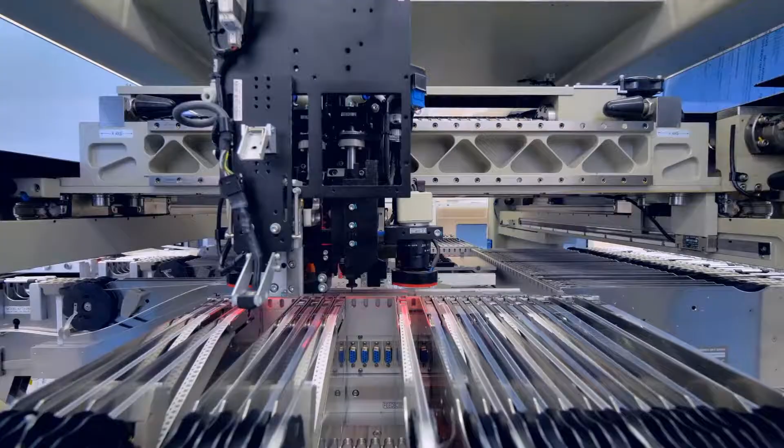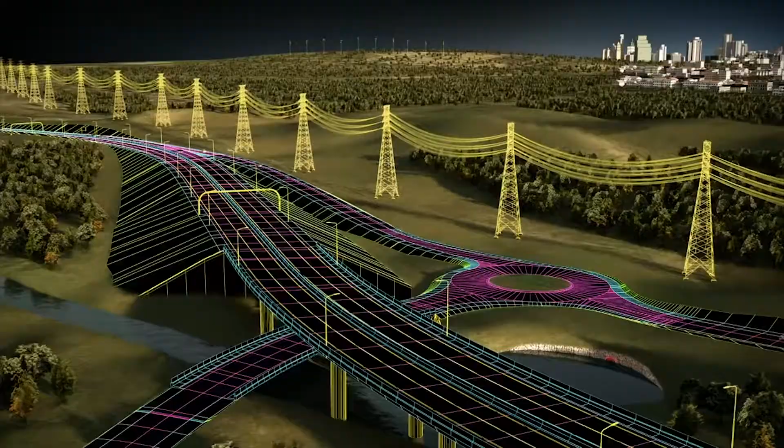Ultimately evolving into a singular solutions-based business for the manufacturing and AEC industries. Central Innovation started as a series of different companies. There was a Graphisoft company, an ArchiCAD company, one specialising in manufacturing, one specialising in architecture. Over the last 25 years, these companies have evolved from bare-based CAD software providers into something more sophisticated.

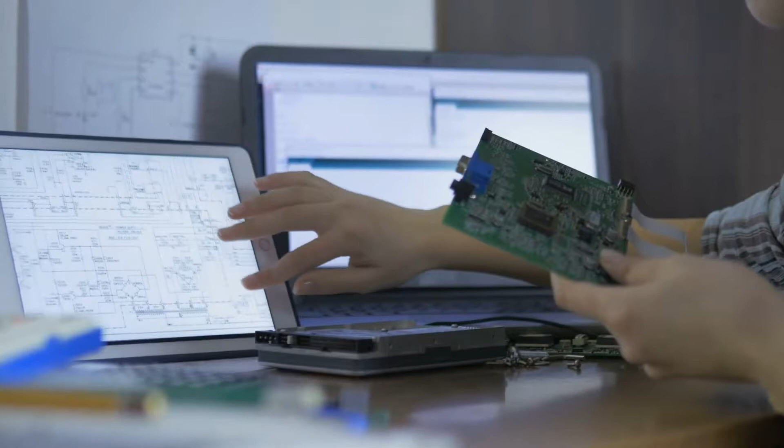This is standardised across both industries with the software, and it's now become a workflow solution that involves a lot more than just simply the software itself. So today, when you think about architectural design and engineering design, the design side is always the creative and analogue side, but the workflow process has become far more important.

So how you connect the pieces from the beginning of designing a product or a building all the way through to delivering that building is far more interconnected than it's ever been before.

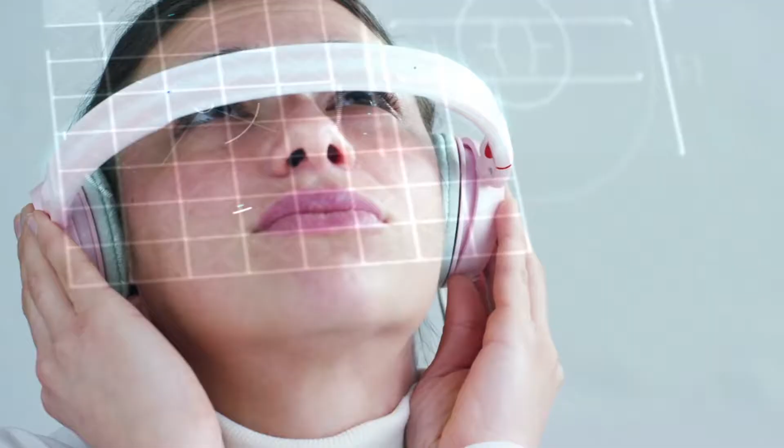And the single biggest change going on in the industry today is the automation of the workflow. So wherever possible, with the digitalisation of the design process, you're interconnecting the original design with the contractors all the way through to the builders themselves, down to building management, facilities management, and handover to owners.

So a much more complicated and sophisticated process, and Central Innovation in its journey has worked with our customers all along the way, evolved with our customers at their request to join more of the dots together. Once upon a time, they were all one-by-one steps done independently. Today, they are all interrelated, all coordinated, and working in what we call the workflow.

Once upon a time, Central Innovation was made up of these single companies that simply sold software. Over the last 10 years, that's evolved, and we've had to take on different service offerings - software, hardware, systems, and people - that in combination provide a higher order product and service solution for our customers.

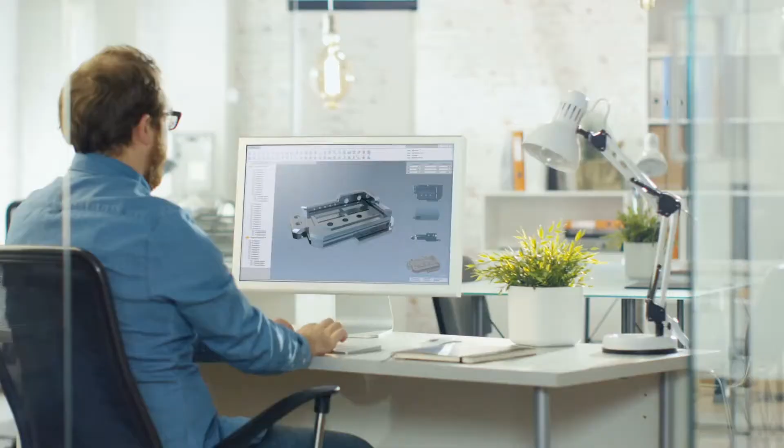The hardware is getting specifically Ferrari-style workstations that can really deliver on the complicated software that's involved with design. Our recruitment business involves not only employing and finding candidates for people, but training them so that our customers have the very best people available with the highest level of skills.

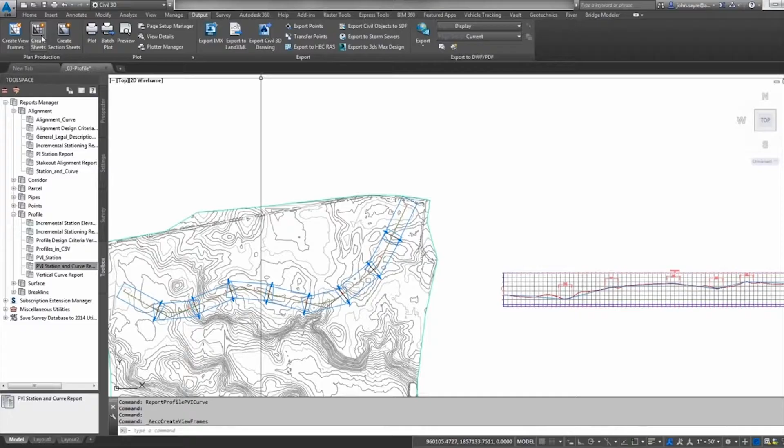Our software business continues to be, as it's always been, the best products from around the world that we can find for our customers to use. And that combines with our systems capabilities, where we bring all of this together to automate the process and to enable our customers to realise the potential of their software in their work environment.

Customers have always been central to our business. By working closely with them over the last 25 years, we've been able to develop solutions for them that enables us to be the very best partners available.

It is them that came to us and said, how do we go beyond software? How do we stretch the envelope?

So customers are central to our business today. The company has grown and evolved based on our interactions with our customers over the last 25 years. In a digital world that is ever more globally competitive, it's been imperative for us to work with our customers to take on the world, not just the local markets they traditionally had to deal with.

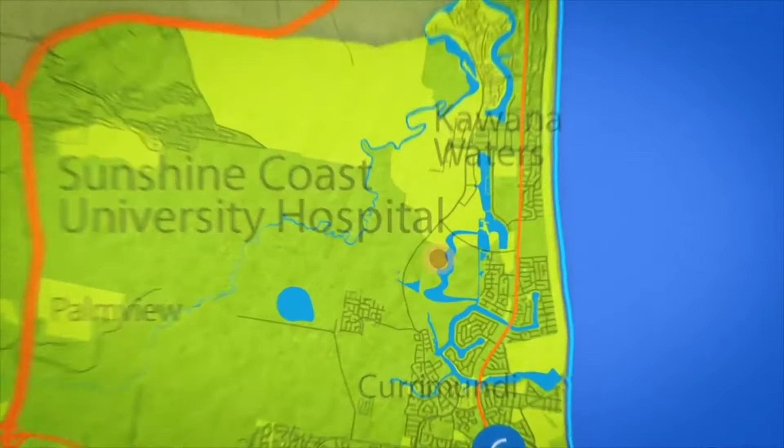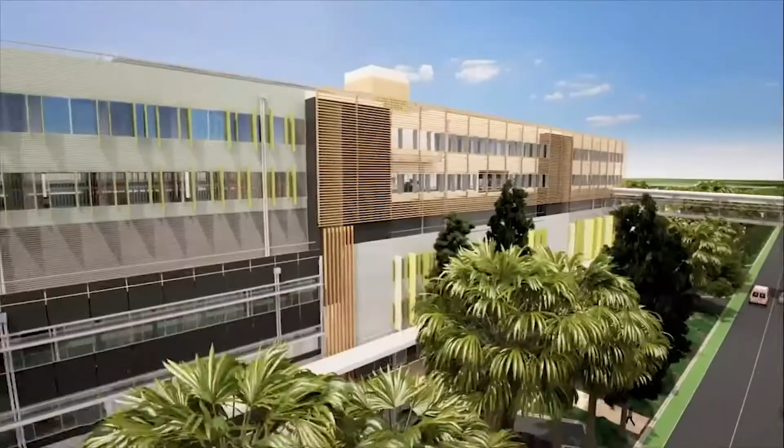The Sunshine Coast University Hospital was the first major health PPP project that the Queensland Government undertook, and was the largest non-replacement greenfield hospital built in Australia in the last 25 years. A really significant project. The need for quality, coordinated documentation was critical for a project of this scale.

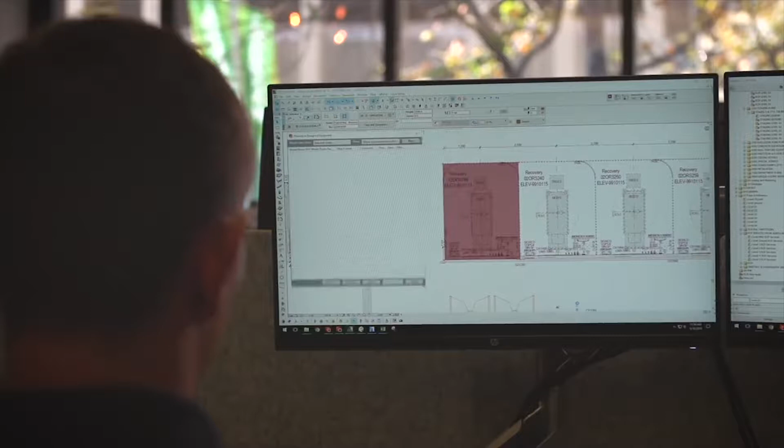The team here at HDR needed a universal approach to collaboration. Interoperability of project files was fundamental for the adoption of digital processes. We opted to combine ArchiCAD, dRofus, and other platforms to deliver this coordinated documentation.

We worked closely with the Central Innovation team to help develop a plugin for ArchiCAD and dRofus, which was not available at the time. When we first proposed our approach to BIM to the client, it was met with skepticism.

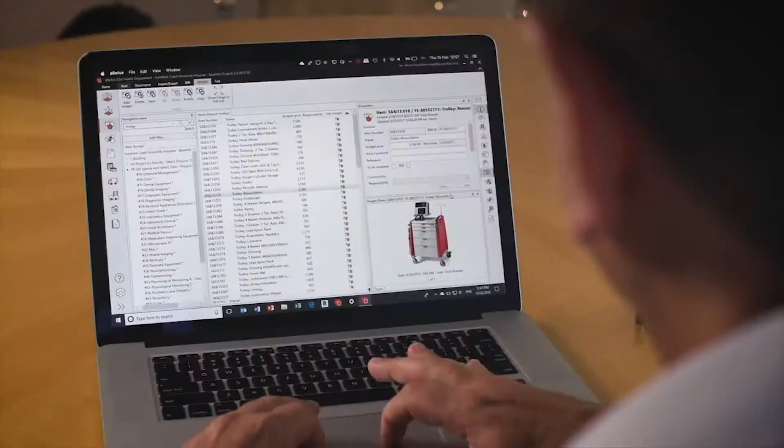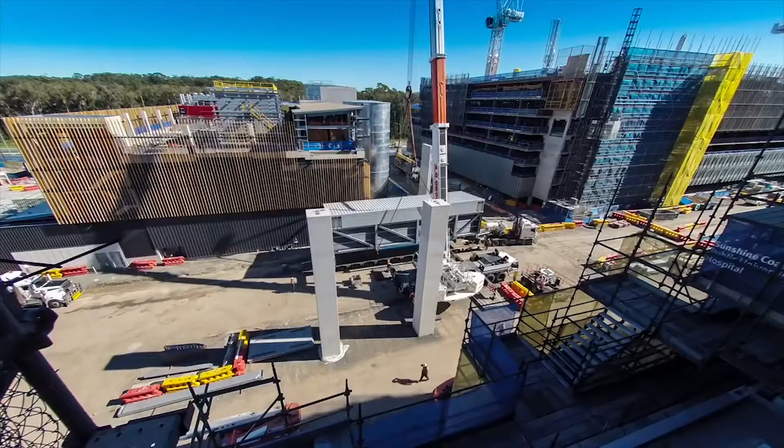The greatest success of this project was the ability for us to deliver bulletproof documentation on time and coordinated across the various disciplines. We proved that by combining ArchiCAD and dRofus, we could achieve the results we needed. The Central Innovation team were instrumental in making this happen.

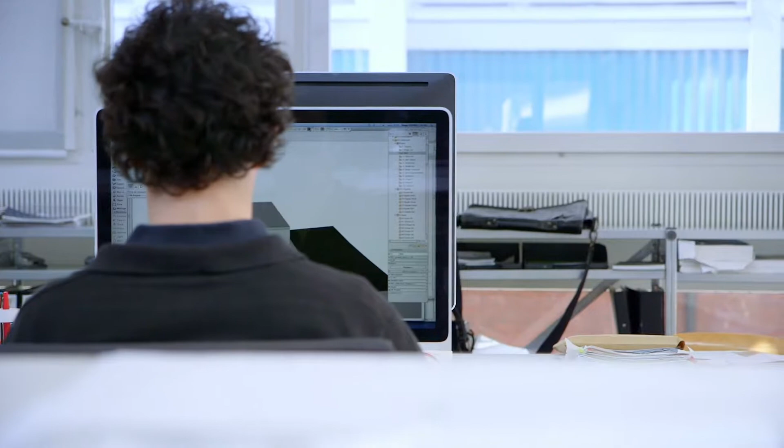We are an award-winning New Zealand-based architectural practice with a strong belief in the power of teamwork and collaboration. From a project's inception through to completion, there is constant dialogue with the client and other contributors, with engineers, constructors, and other specialists. This has brought about many challenges, namely sharing complex documents across various platforms, teams with the ability to adapt and handle a fast rate of change, and to document the process efficiently. So we really needed a specialised team to help us achieve our goals.

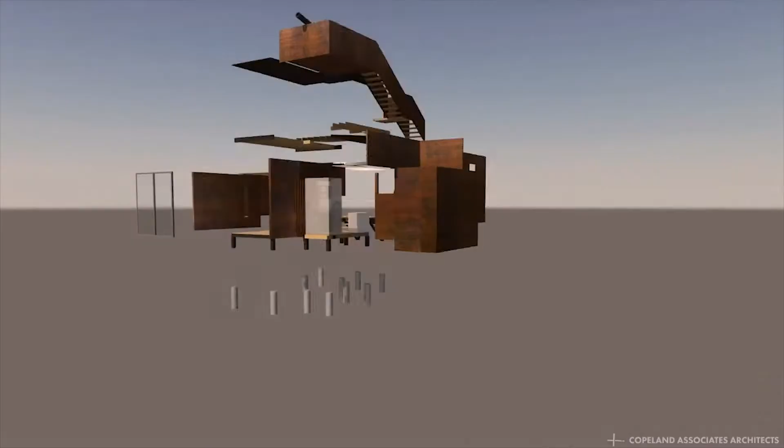We approached Central Innovation, who guided us through the entire process of implementing the ArchiCAD suite into our practice that has truly transformed our operations.

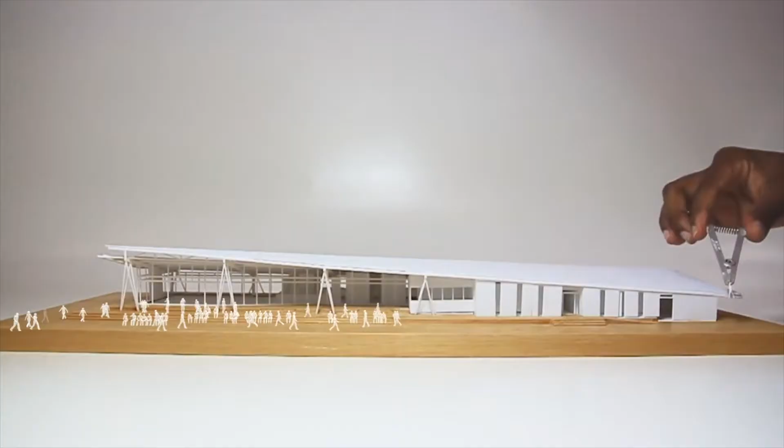It was clear to us that ArchiCAD was far superior in terms of tailored tools for the New Zealand building industry. We were also impressed by the customer support system established by Central Innovation. ArchiCAD has now become a vital part of our business success.

ArchiCAD has allowed us to become more productive with the team we have and given us the opportunity to broaden our service offering in-house. We couldn't be happier with the knowledge and service Central Innovation delivered, and we're certainly benefiting from the results.

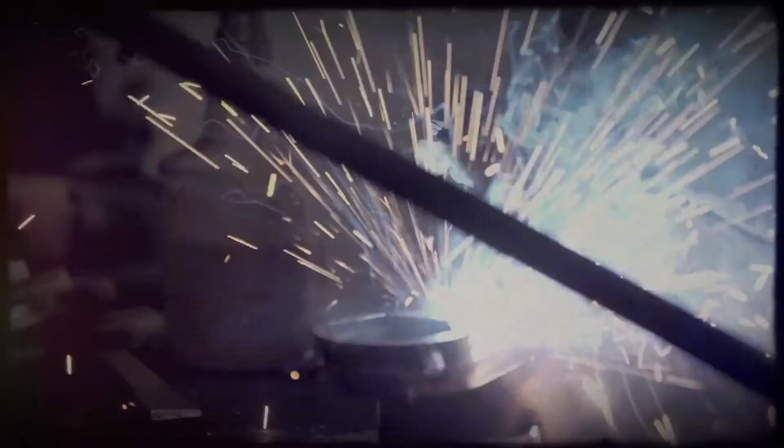Central Innovation has been assisting us at Kelley Engineering with our design processes for the past 7 years.

Having initially utilised SolidWorks PDM Professional to get our engineering documentation under control, the next step for us was to consult with Central Innovation on how it could be further used to implement an engineering change workflow.

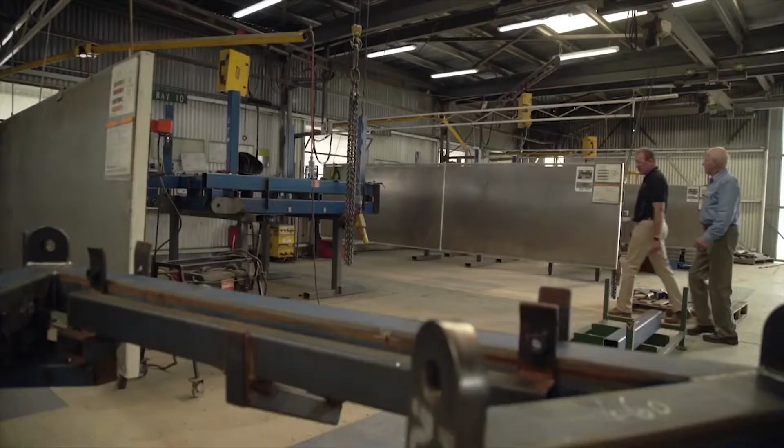They've recently assisted in the implementation of DataSuite Data Transformation Solution, which facilitates the seamless transfer of data across multiple platforms by providing a common language between systems.

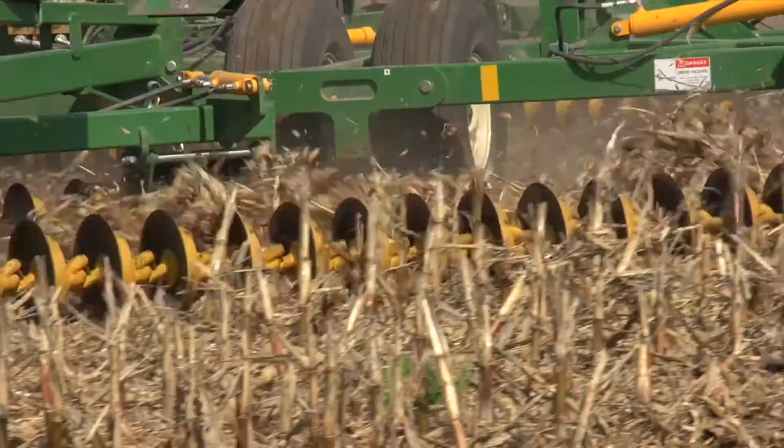We wanted to transform the organisation from a paper-based to an electronic system to optimise our supply chain and production, as well as those of our overseas partners.

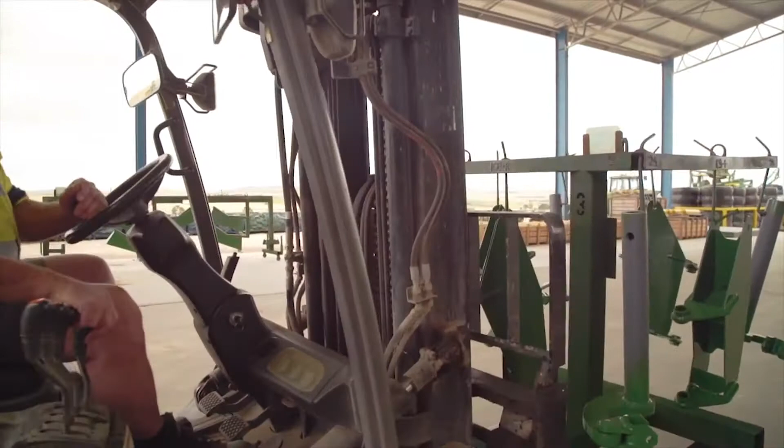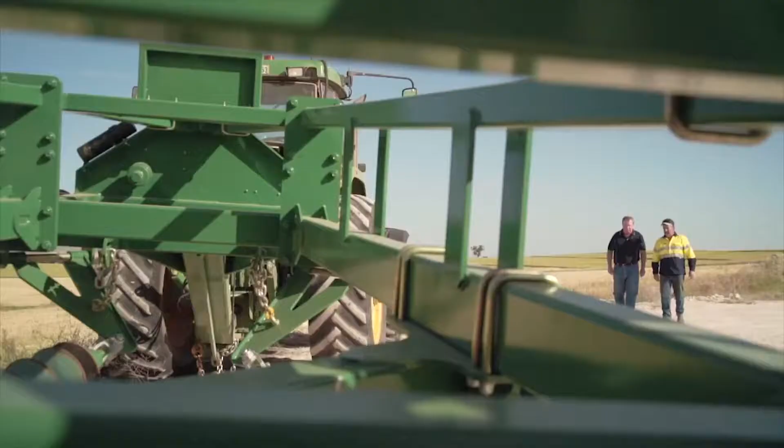By providing us with the DataSuite solution, Central Innovation has enabled us to automate data transfer from SolidWorks into Ostendo. Everything from the generation of part numbers, 3D thumbnails and isometric views, so we can see them directly on the detail screen in Ostendo, to the creation of model-based definition database files.

I've nothing but praise for the whole Central Innovation team, not only in terms of their knowledge of best practice across a broad range of industries, but their ability to apply it to a specific situation and provide us with a customised solution.

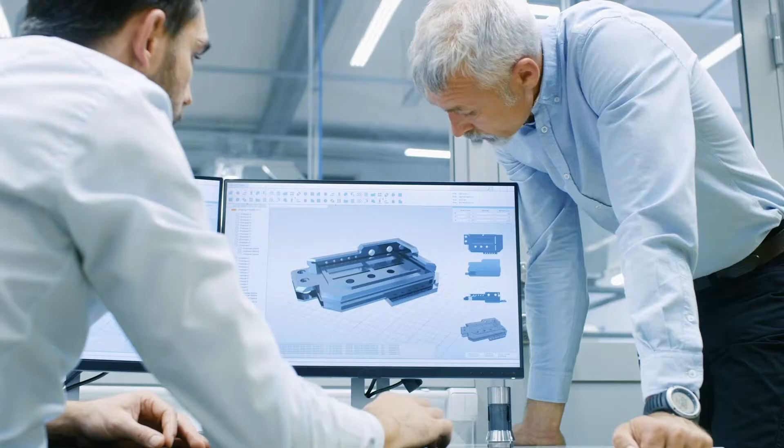I am Shoji Sinclair from Sinclair Product Design. Central Innovation has been integral in facilitating SolidWorks as our design and collaboration platform between ourselves and our client, Toro Australia. As the industry standard CAD software package, SolidWorks allows us to design and collaborate with our clients seamlessly.

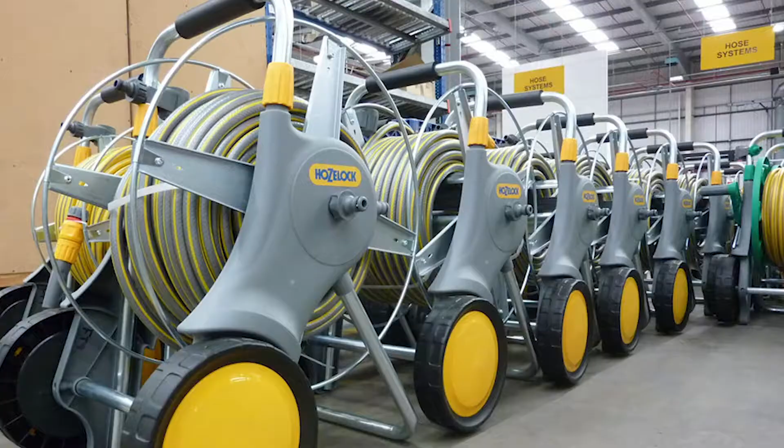Central Innovation is our valued partner, providing us with the tools, training and support, allowing us to grow our business.

Customer support is critical in our business, and it's great to know if we have an issue, all we have to do is phone Central Innovation and the person at the other end of the line will always understand what's going on. The team at Central Innovation are not only highly professional, they're also very results orientated.

And they provide us with efficient and personalised service. With those qualities, they tick all the relevant boxes for us. Central Innovation ensures that our systems and people are working together for the best business outcomes.

The thing that connects us all together in this industry, both the AEC and the MFG industries, is we like to build stuff. We love to fix things. And it's providing those solutions.

It's that ability to engage each and every day with your customers, our customers, with the world at large, solving those sorts of problems. There's nothing better for any industry than to be successful, but better still to have successful customers.

So our passion and our commitment each and every day is to make sure that we're helping Australian and New Zealand manufacturers and constructors to go out and compete globally to ever more effective levels and deliver this design to the rest of the world.